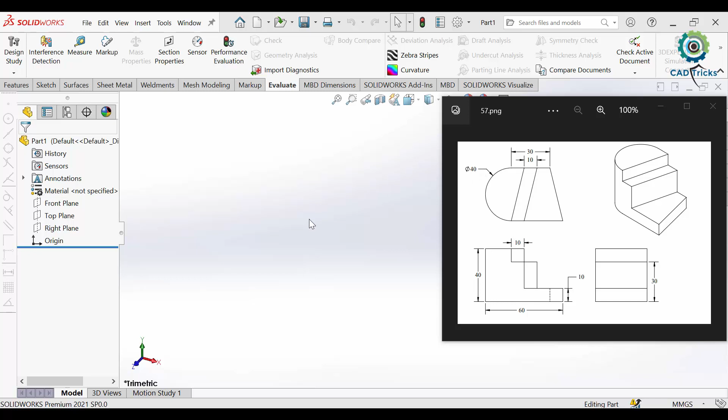I will go to sketch and select the top plane to start with it. I will choose rectangle. Then I will start drawing a rectangle from the origin and I will add dimensions. It's 60 millimeters by 40 millimeters.

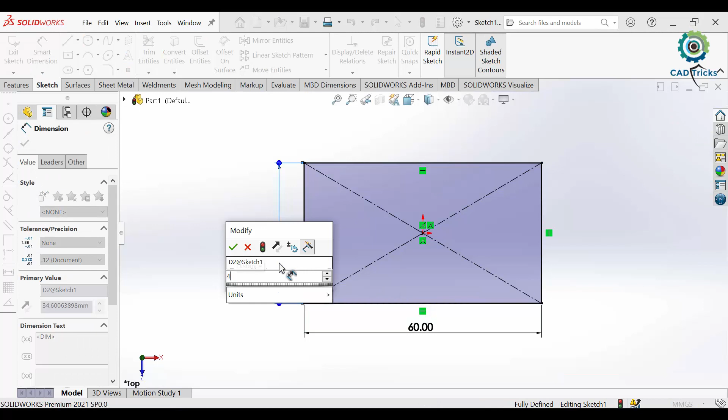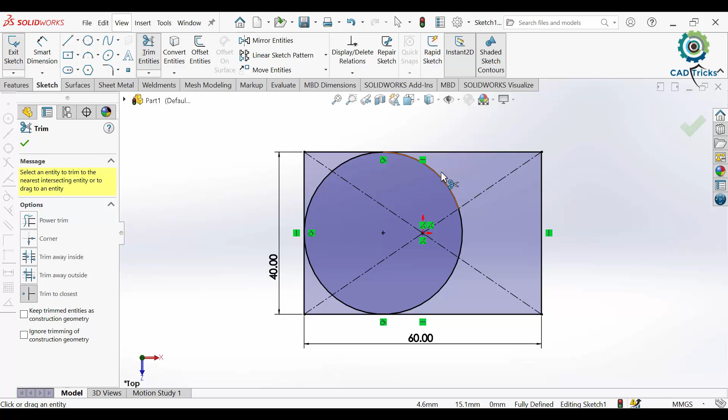Now I will draw a circle, 3 points, from this edge and this edge and this edge. It's defined as 40 millimeters diameter. Then I will go to trim and delete the extra lines of the circle and rectangle. You will see that the rectangle's lines turned blue. We will make them black again to be defined.

We'll define everything from the origin point. It's 30, and this is 20 millimeters. It's 20 also. Now I need to define the origin of the circle. I'm defining the circle from the right line.

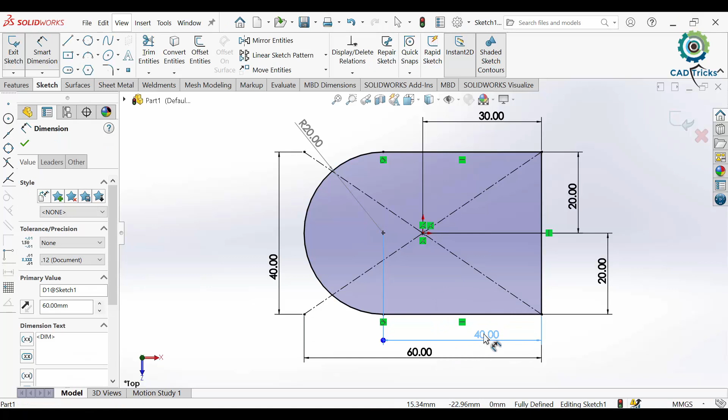If we see the drawing here, we see some inclined lines. We will draw them in this sketch. This first line. This point. I will define this dimension: 30.

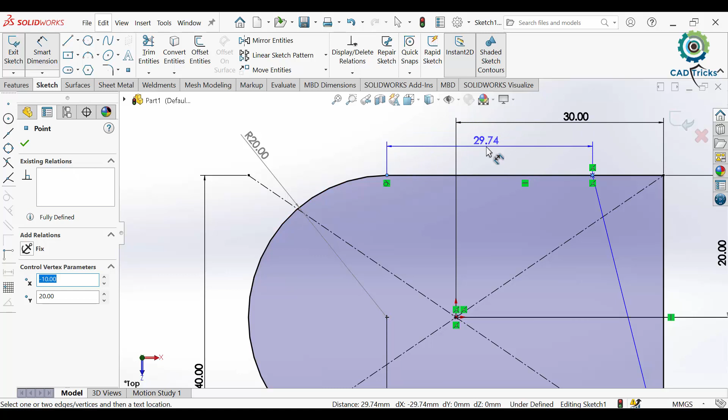And I trim the extra line to the rectangle. I know I need extra trims and I will define the rectangle many times, but I do this example in SolidWorks fast. So let's continue. I'll define the blue lines again.

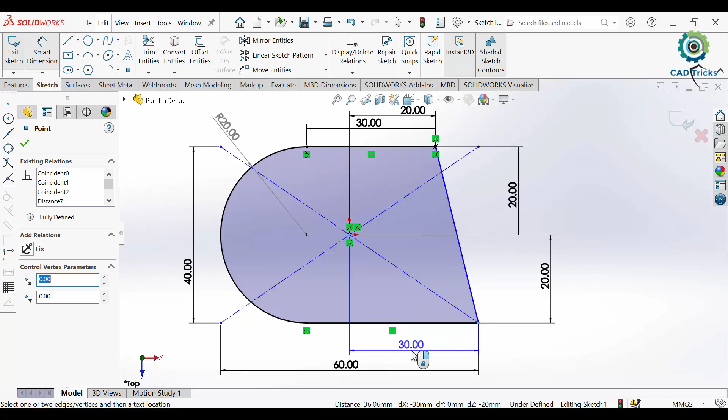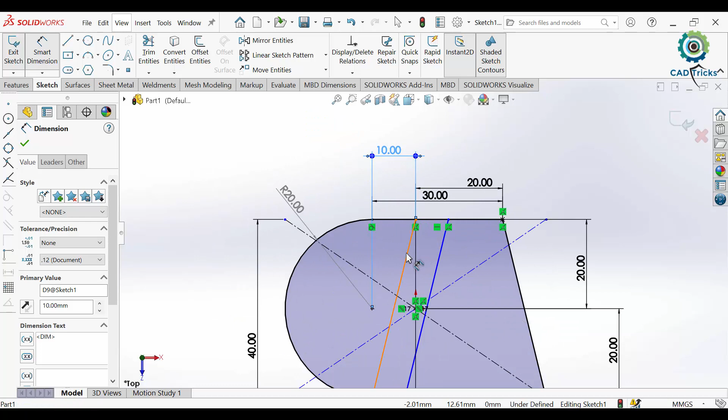There are an extra 2 lines, 10 millimeters. I will draw it. It's inclined to the other direction. And the second line is parallel to it, at 10 millimeters distance. They are parallel. The distance from here to here is 10 millimeters.

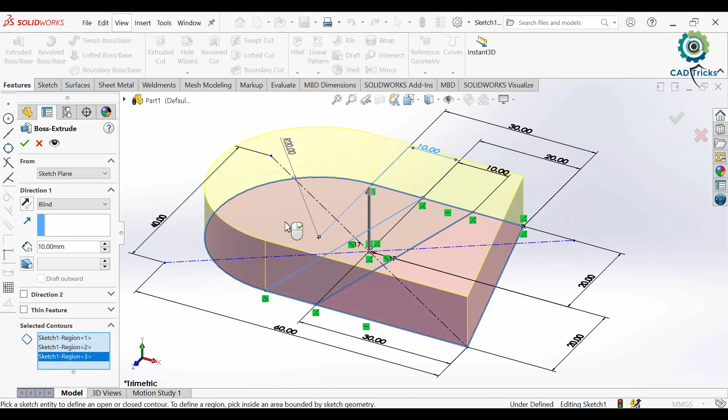My way of drawing in SolidWorks is to draw the whole sketch if we will use the same plane, then I will extrude part by part. So here I extrude the whole area by 10 millimeters. Then for the same sketch, I will extrude the second area by 30 millimeters from the ground.

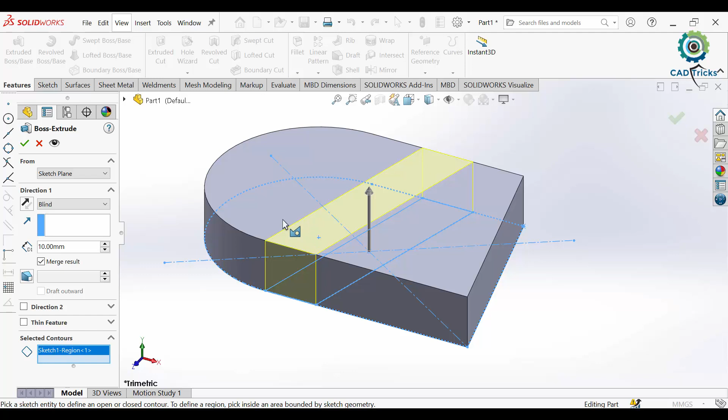And the third area is 40 millimeters from the ground. Here we are. Now it's the same as the 2D sketches.

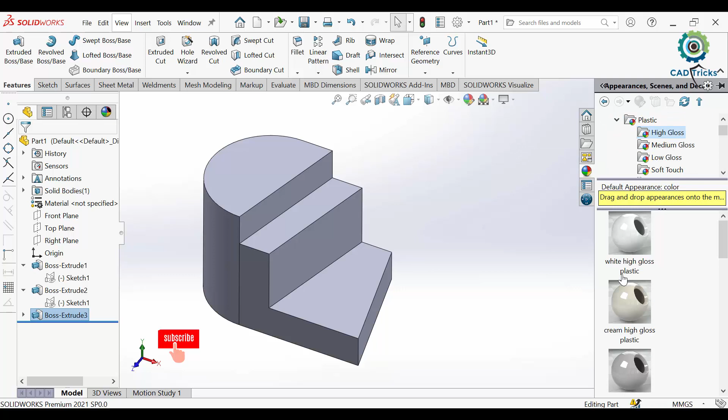Now we'll add appearance to it. I like to add yellow color. So I went to plastic, high gloss, I choose here. It chose the last feature, but I will choose all features and select yellow color. Here we are.